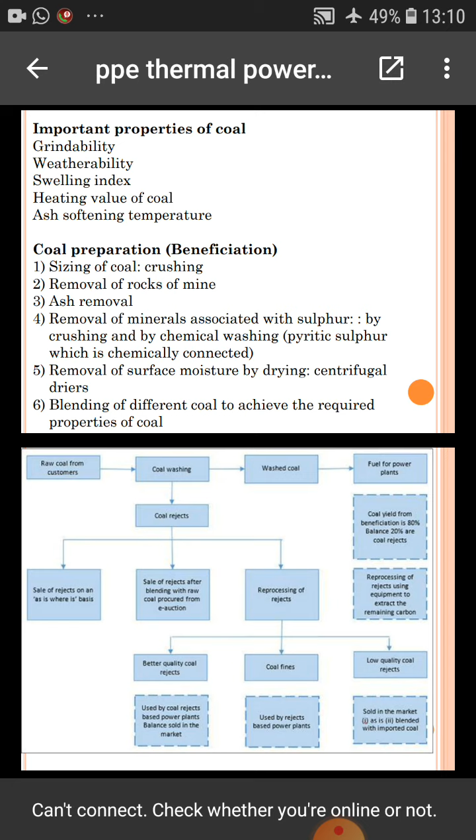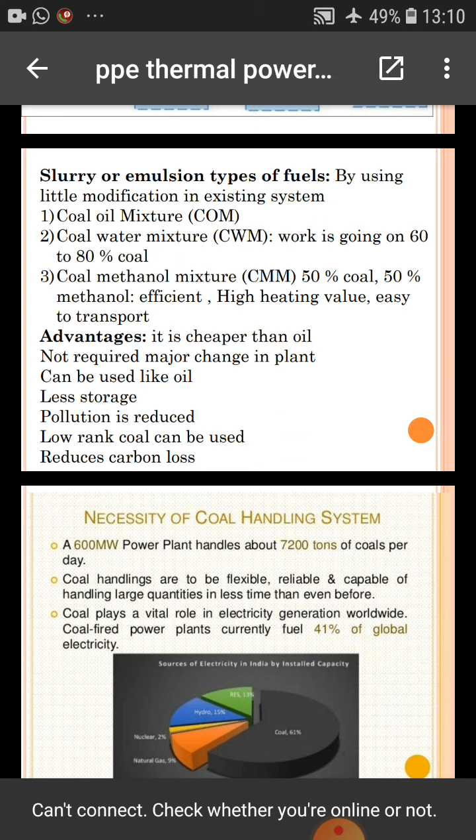Slurry or emulsion type fuels are made using little modification in existing systems: coal oil mixture, coal water mixture with 60 to 80% coal, and coal methanol mixture with 50% coal and 50% methanol. Advantages are that it is cheaper than oil, does not require major changes in the plant, can be used like oil, needs less storage, reduces pollution, low rank coal can be used, and reduces carbon loss.

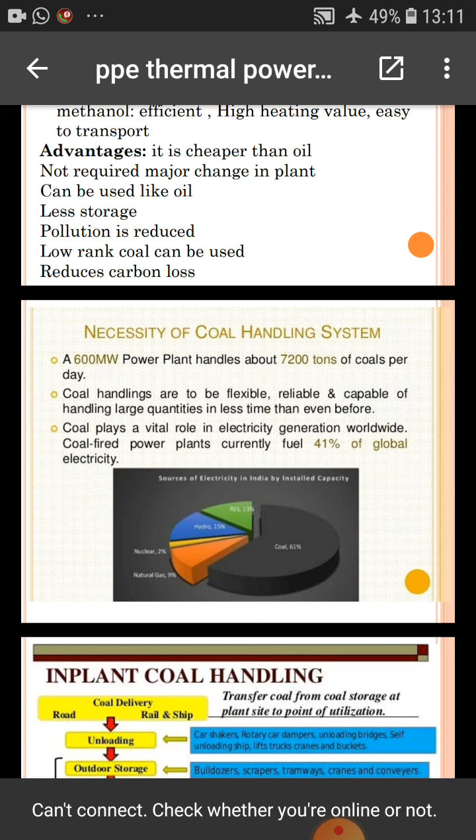Necessity of coal handling system: a 600 megawatt power plant handles about 7200 tons of coal per day. Coal handling has to be flexible, reliable, and capable of handling large quantities efficiently.

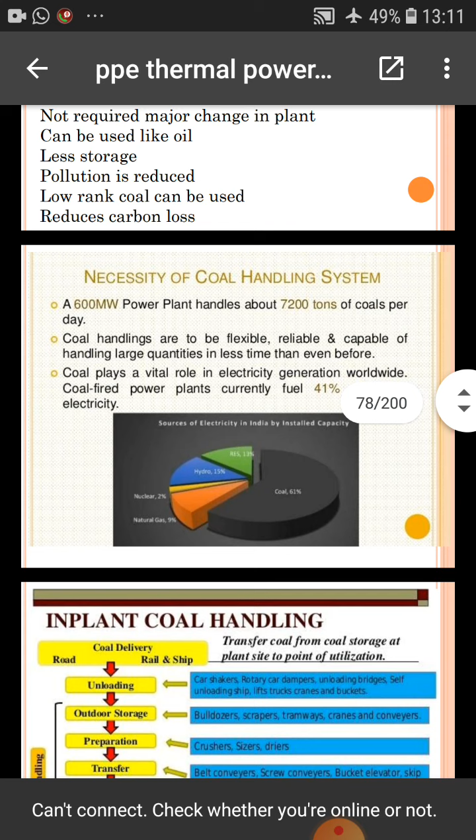Coal plays a vital role in electricity generation worldwide. Coal-fired power plants currently fuel 41% of global electricity.

In-plant coal handling includes coal delivery, unloading, outdoor storage, preparation, transfer, covered storage, inplant handling, weighting and furnace firing, and coal transportation by river, rail, road, and pipe.

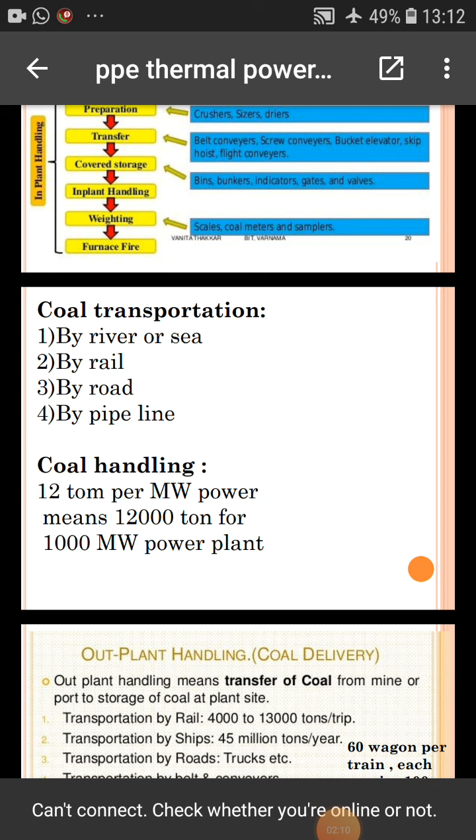Coal handling is about 12 tons per megawatt of power, meaning 12,000 tons for a 1000 megawatt power plant.

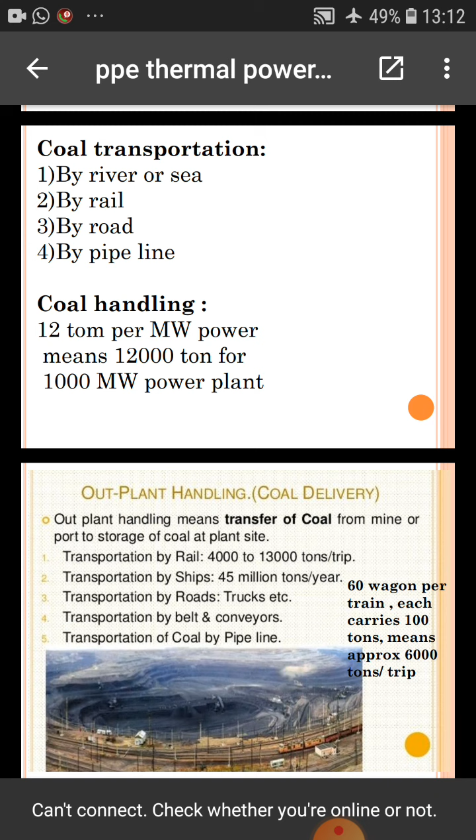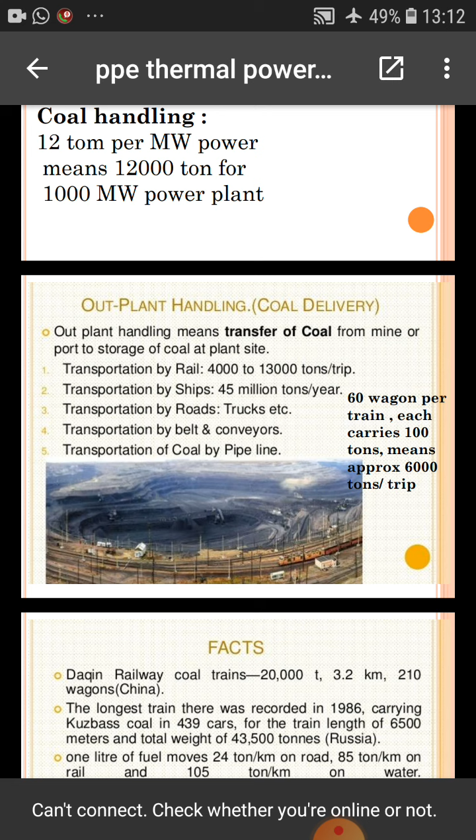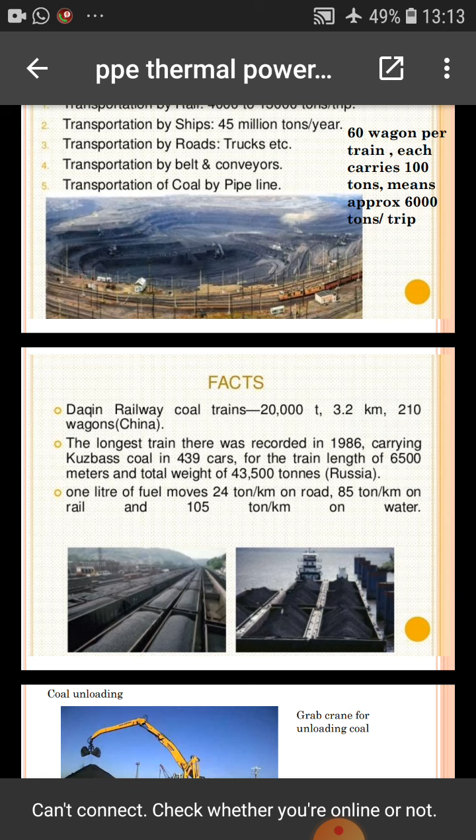Facts: a railway coal train of 20,000 tons over 3.2 kilometers with 210 wagons in China. The longest train was recorded in 1986 carrying Kuzbass coal in 439 cars, with a train length of 6,500 meters and total weight of 43,500 tons in Russia. One liter of fuel moves 24 ton-kilometers on road, 85 ton-kilometers on rail, and 105 ton-kilometers on water.

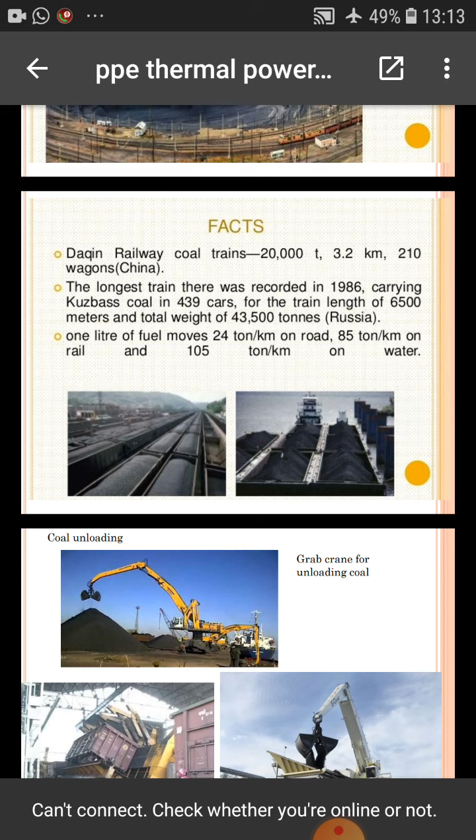Grab bucket elevator: it is used for lifting as well as transfer. This is the grab bucket elevator.

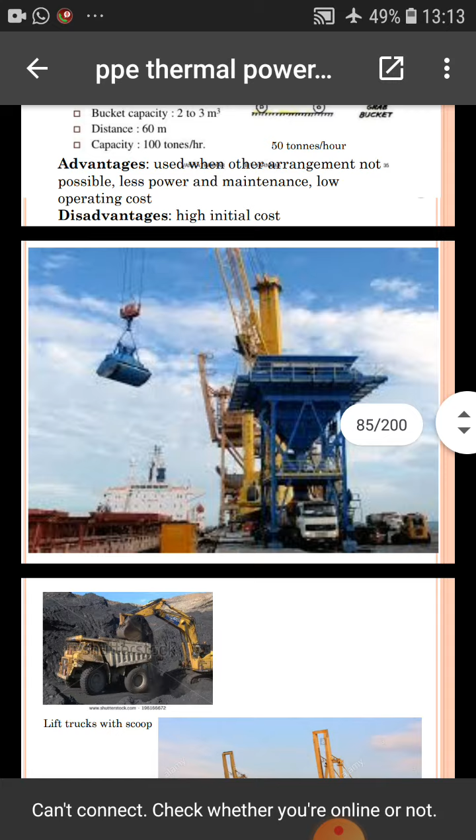For transfer of coal, different equipment includes belt conveyor, screw conveyor, bucket elevator, grab bucket elevator, flight conveyor or scraper, and skip hoist.

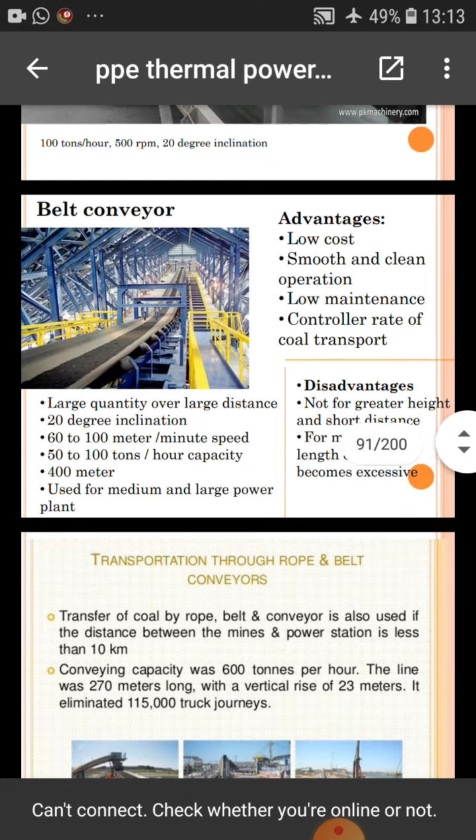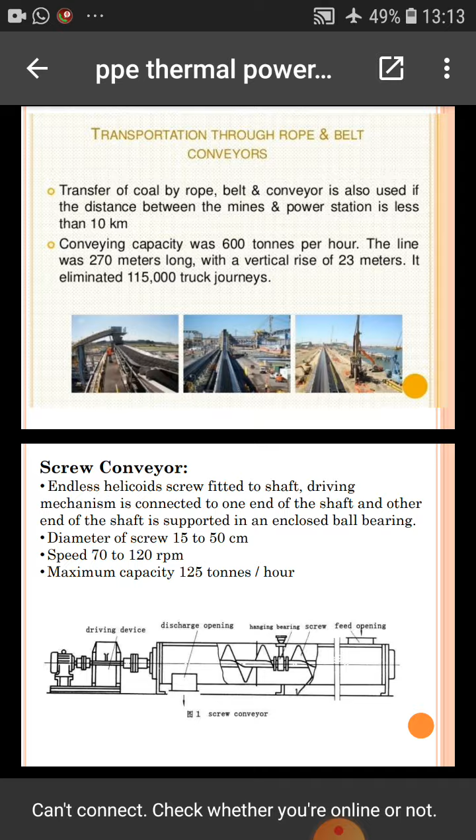Transportation by rope and belt conveyor are also used. These are all types of coal transportation: belt, screw conveyor, bucket elevator, flight conveyor or scraper, as already discussed.

Vibrating separator: this size separator is fitted after the crusher to screen out coal below the required size. Oversized coal is returned to the crusher for further proper crushing.

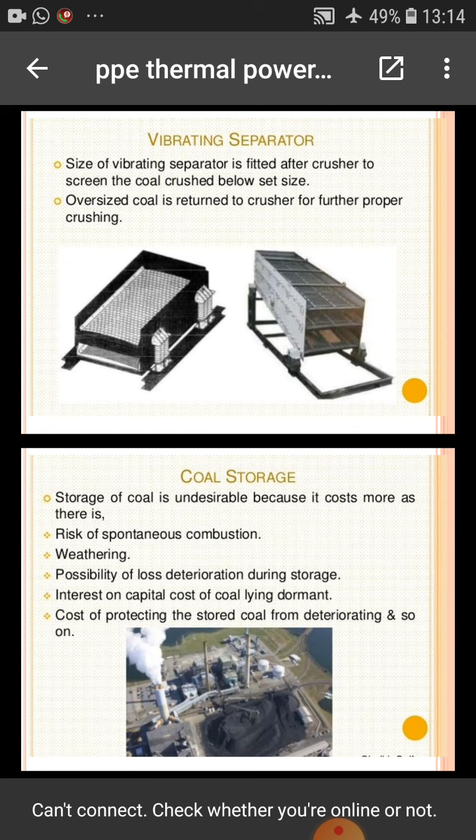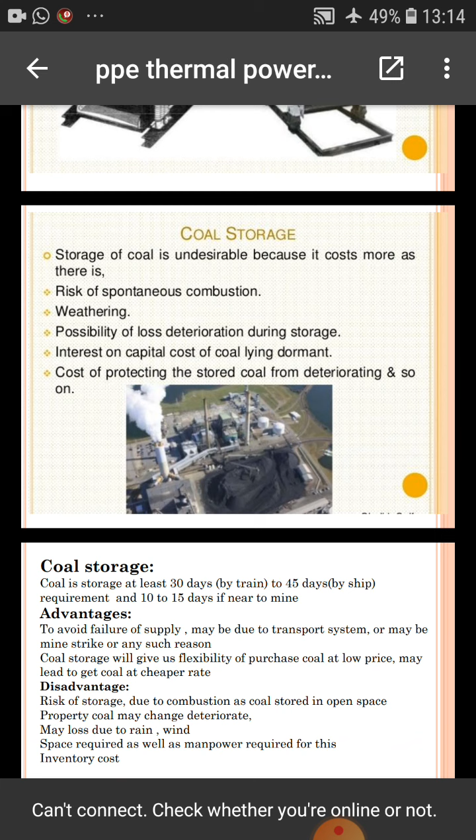Coal storage is undesirable because it costs more, as there is risk of spontaneous combustion, weathering, possibility of loss deterioration during storage, interest on capital cost of coal lying dormant, and cost of protecting the stored coal from deteriorating. So there are advantages and disadvantages to coal storage.

Coal is stored for at least 30 days if delivered by train, up to 45 days by ship, and only 10 to 15 days if near the mine.

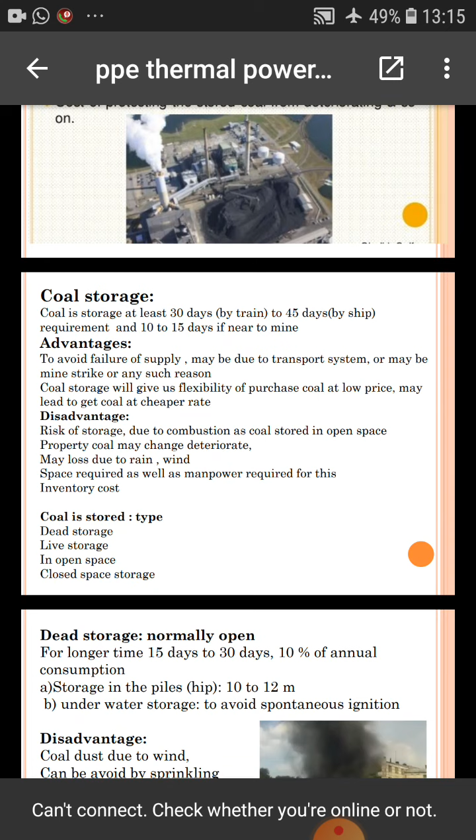There are advantages and disadvantages to this. To avoid failure of supply, coal storage gives flexibility and allows purchase of coal at low price, with may lead to get coal at cheaper rates. Disadvantages include risk of storage loss due to rain, and the space and manpower required adding to inventory cost.

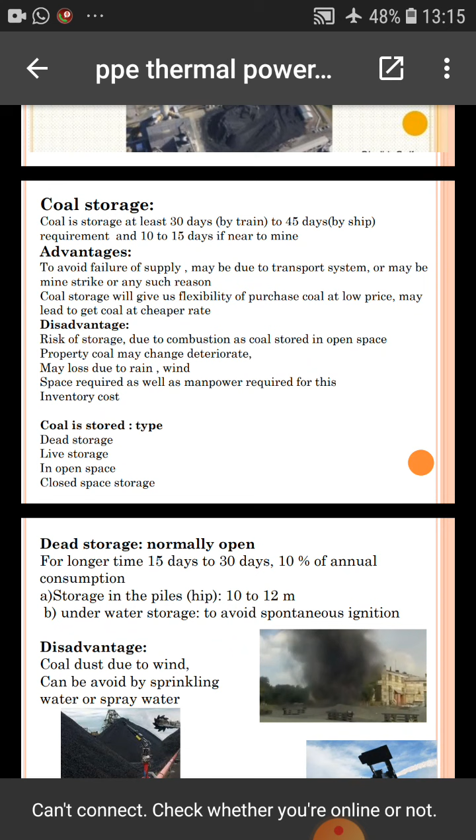Coal storage types include dead storage, live storage in open space, and closed space storage. Dead storage is used for longer periods, typically 15 to 30 days.

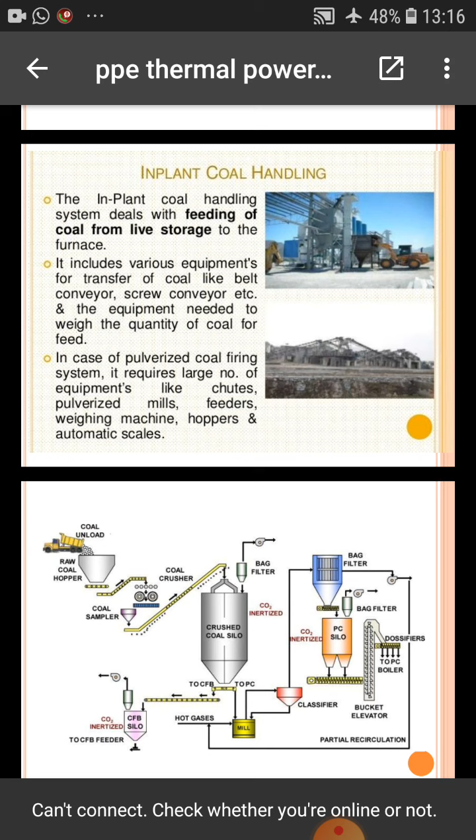In case of pulverized coal firing systems, it requires a large number of equipment like chutes, pulverized mills, feeders, weighing machines, and automatic scales.

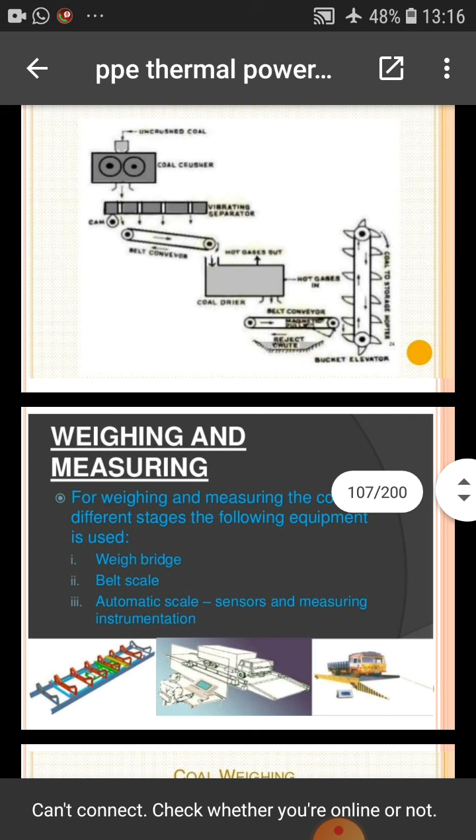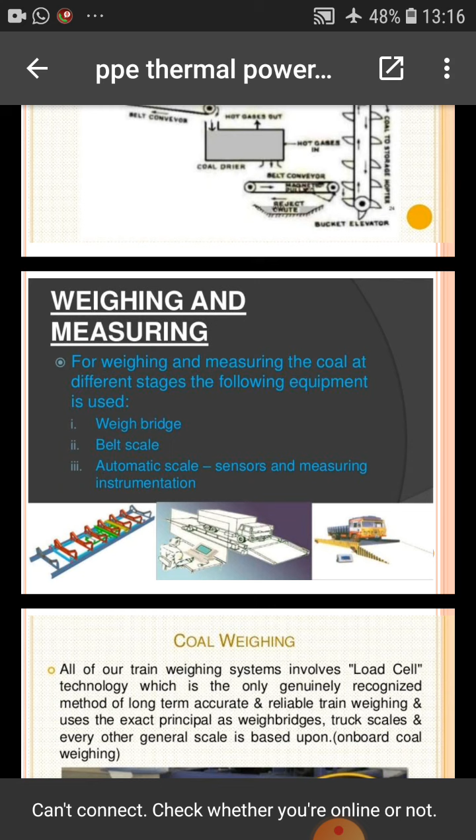After that, coal preparation involves weighing and measuring. For weighing and measuring coal at different stages, equipment used includes weigh bridge, belt scale, automatic scale, sensors, and measuring instrumentation.

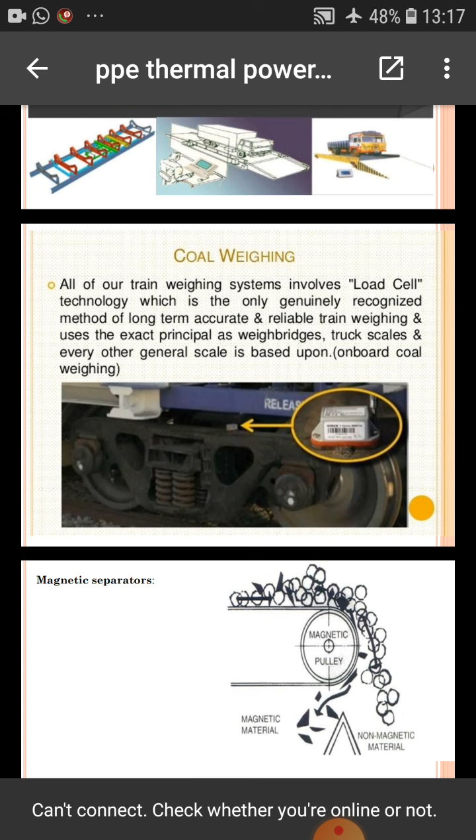Coal weighing: all train weighing systems involve load cell technology, which is the only genuinely recognized method of long-term accurate and reliable train weighing, using the same principle as weighbridges, truck scales, and other general scales based upon onboard coal weighing. Next is crushing of coal.

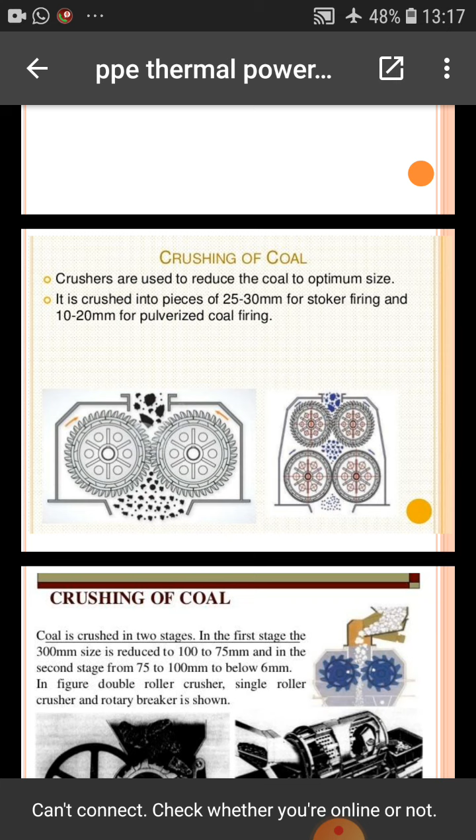Crushers are used to reduce the coal to optimum size. It is crushed into pieces of 25 to 30 mm for stoker firing and 10 to 20 mm for pulverized coal firing. Crushing of coal.

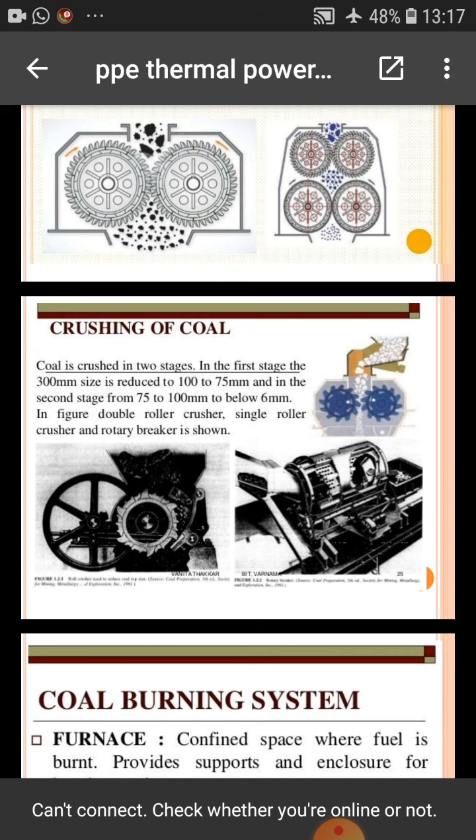Coal is crushed in two stages. In the first stage, the 300 mm size is reduced to 100 to 75 mm, and in the second stage, 75 to 100 mm to below 6 mm. In the figure, double roller crusher, single roller crusher, and rotary breaker are shown.

Coal burning system. Furnace: a confined place where fuel is burned, providing support and enclosure for burning equipment. For solid fuel like coal, coke, and wood, a stoker is used to convey the coal and a grate to hold the fuel.

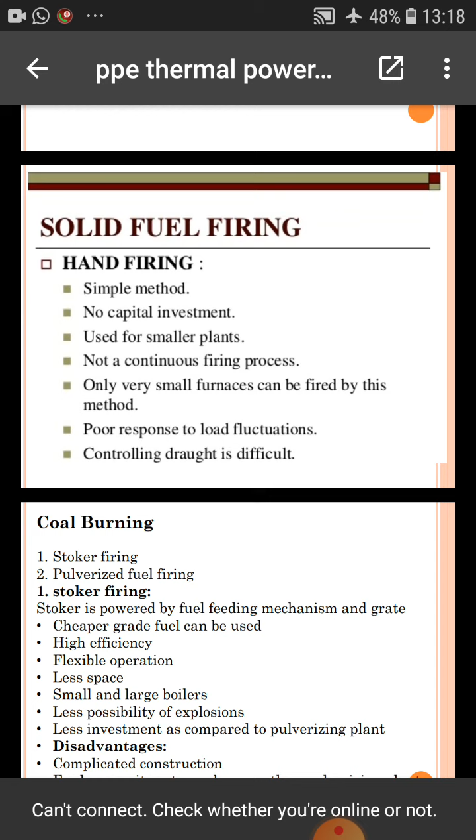For pulverized coal and liquid fuel, burners are used. Solid fuel firing includes hand firing and stoker firing. Hand firing is a simple method with no capital investment, used for smaller plants, and is not a continuous firing process. Only very small furnaces can be fired by this method.

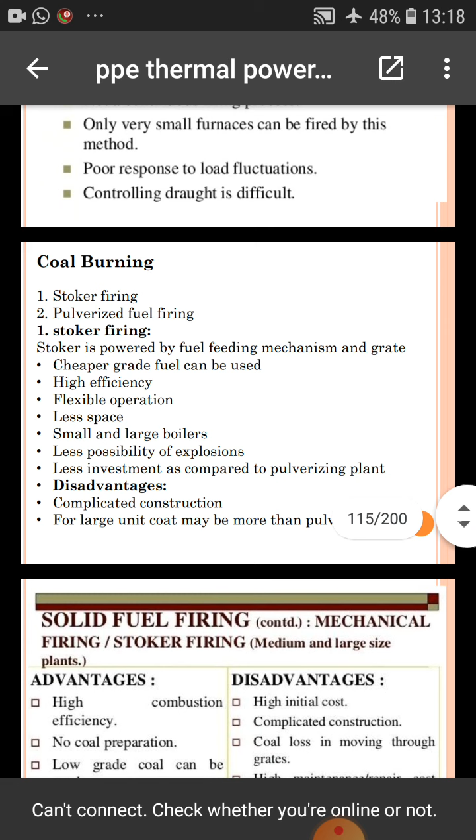Controlling draught is difficult in hand firing. Coal burning includes stoker firing and pulverized fuel firing. This is the coal burning process. After that, stoker firing: the stoker is powered by a fuel feeding mechanism and grate.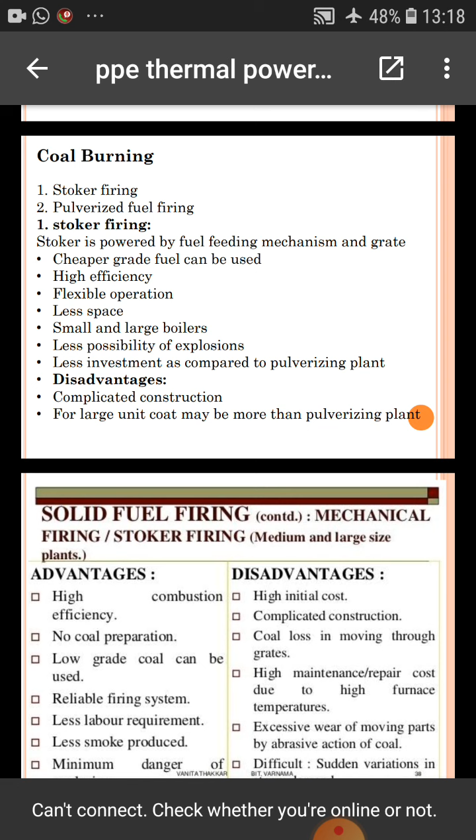Advantages and disadvantages of solid fuel firing. This is mechanical firing or stoker firing, used for medium and large size plants.

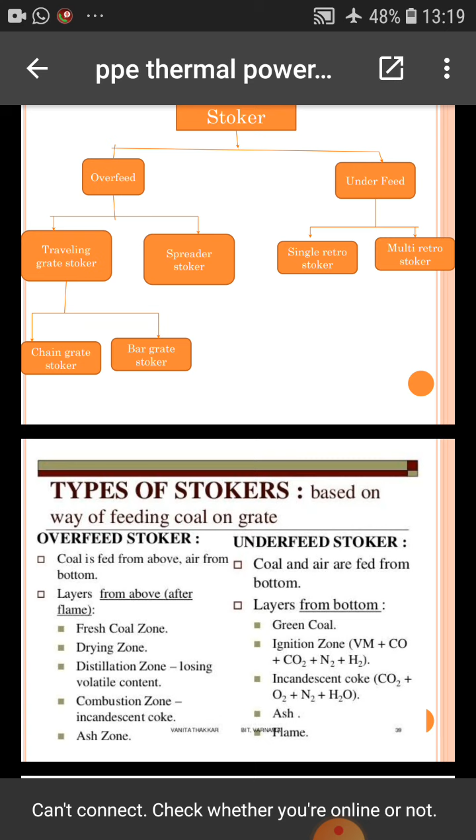Here, advantages and disadvantages are given in the table. This is a chart of stoker types: overfeed, underfeed, traveling grate stoker, spreader stoker, single retort stoker, multi retort stoker, chain grate stoker, and bar grate stoker.

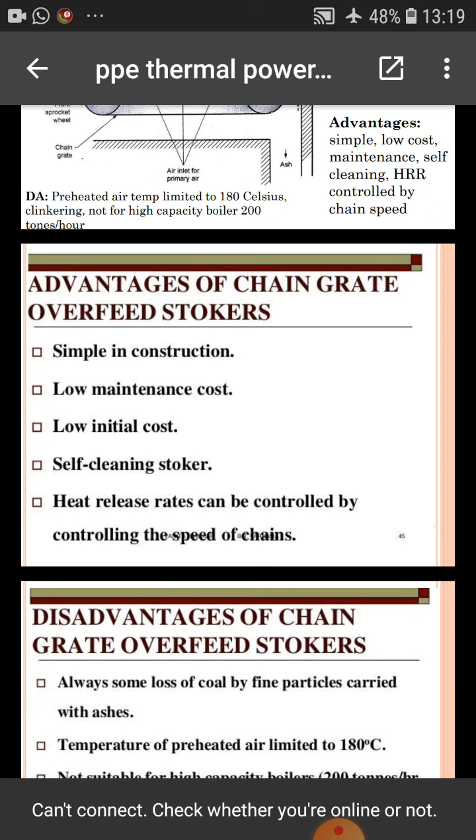This is the chain grate stoker. Advantages of chain grate stoker: simple in construction, low maintenance cost, low initial cost, self-cleaning stoker. Heat release rate can be controlled by controlling the speed of the chain.

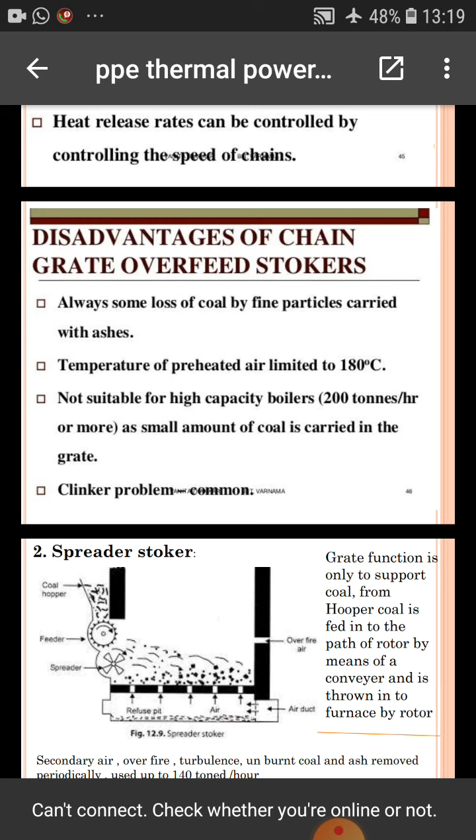Spreader stoker. This is the diagram of spreader stoker. The grate's function is only to support the coal. Coal from hopper is fed into the path of the rotor by means of a conveyor and is thrown into the furnace by the rotor.

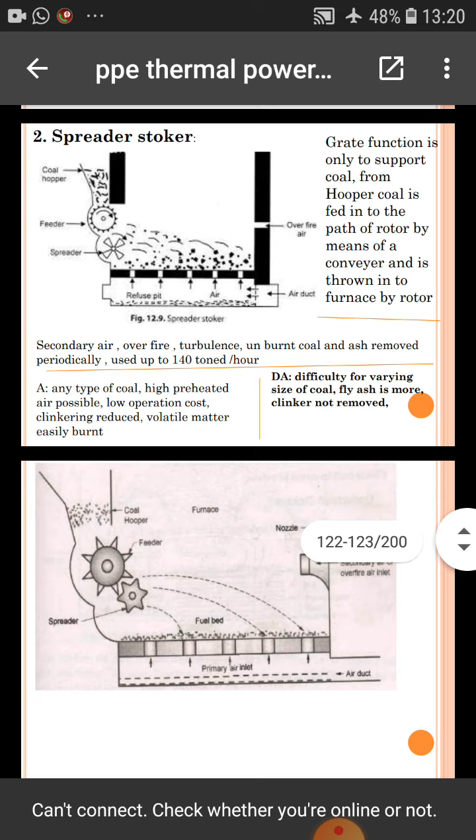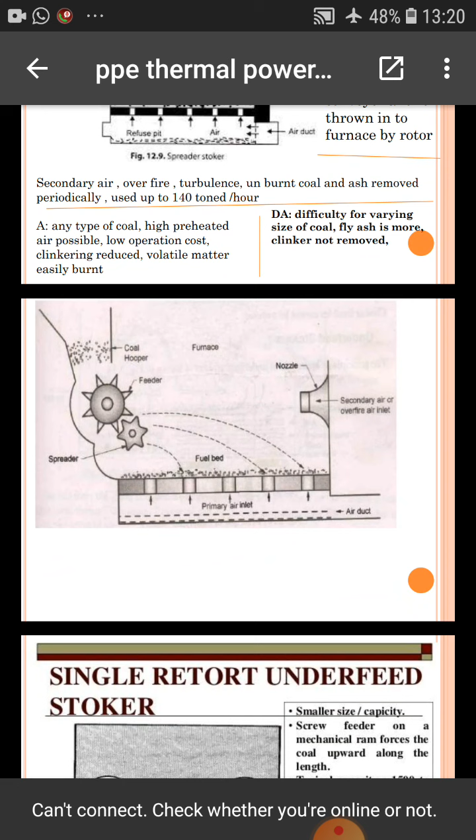Secondary air creates over-fire turbulence, and unburned coal and ash are removed periodically. Used up to 140 tons per hour. Single retort underfeed stoker.

In the smaller size and capacity screw feeder, a mechanical ram pushes the coal upward along the length. Typical capacity is 1500 to 15,000 kg per hour.

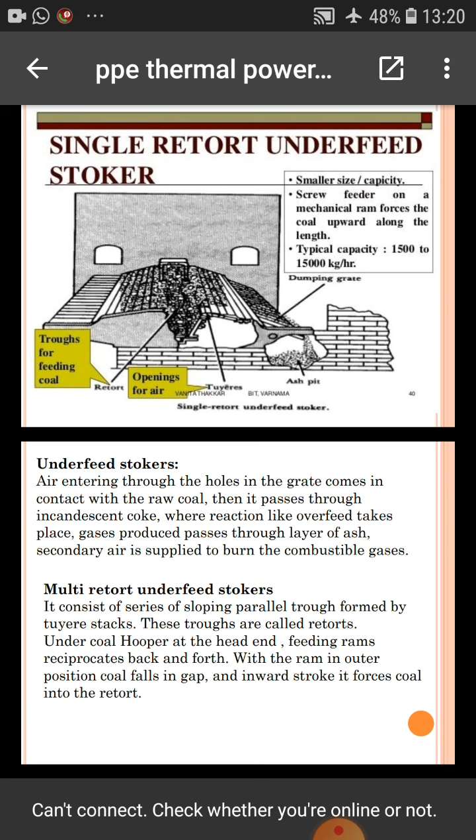In the underfeed stoker, air entering through holes in the grate comes into contact with the raw coal, then passes through the incandescent coke where reactions like overfeed take place. Gases produced pass through the layer of ash, and secondary air is supplied to burn the combustible gases.

Multi-retort underfeed stoker consists of a series of sloping parallel troughs formed by tuyere stacks. These troughs are called retorts. Under the coal hopper at the head end, the feeding ram reciprocates back and forth. With the ram in the outer position, coal falls in the gap, and in inward stroke it forces coal into the retort.

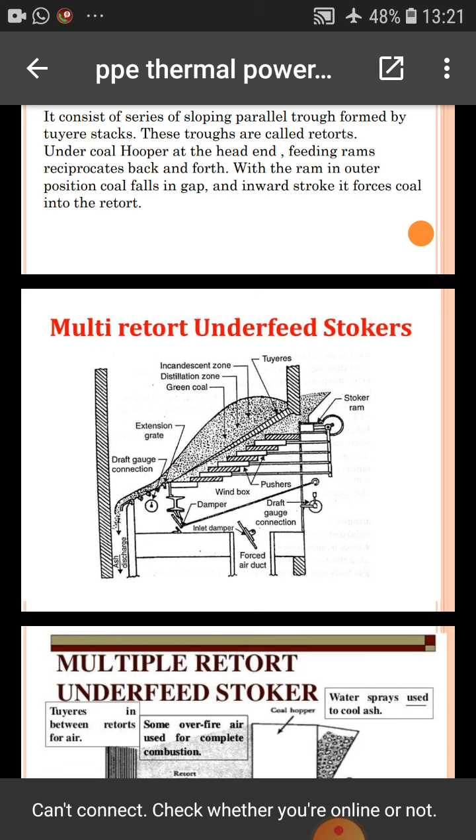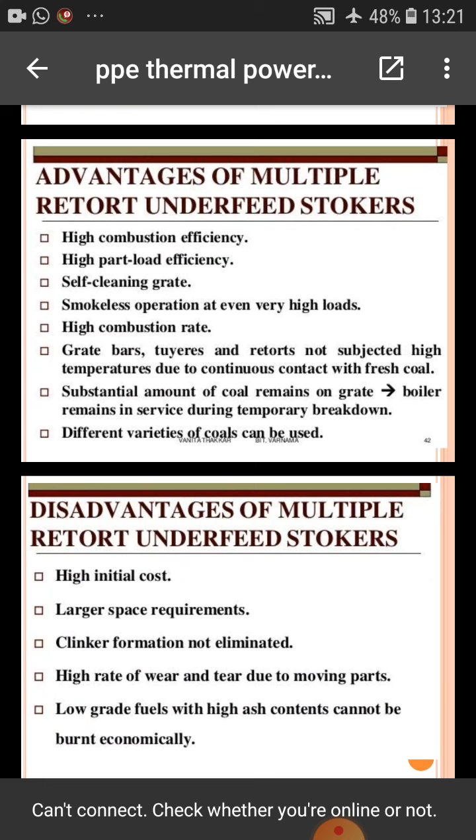This is the diagram of multi-retort underfeed stoker. Advantages and disadvantages of multi-retort underfeed stoker.

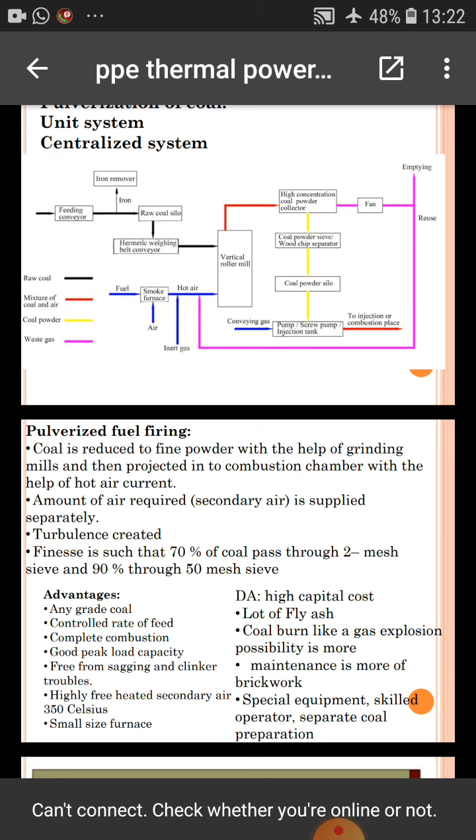Pulverized coal unit system and centralized system. In the pulverized coal system, coal is reduced to fine powder with the help of grinding mills and then projected into the combustion chamber with the help of hot air current. That is called pulverized fuel firing.

After that, unit system: this is shown in the figure, coal grinding plant for semi-direct firing. Advantages and disadvantages of unit system have been discussed.

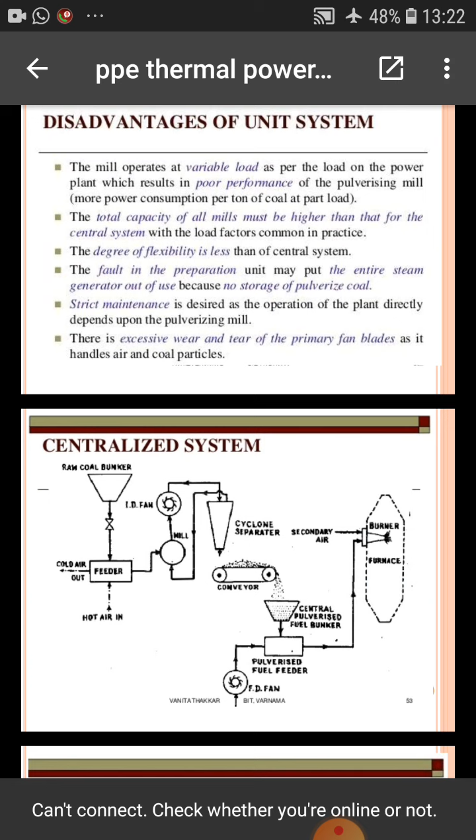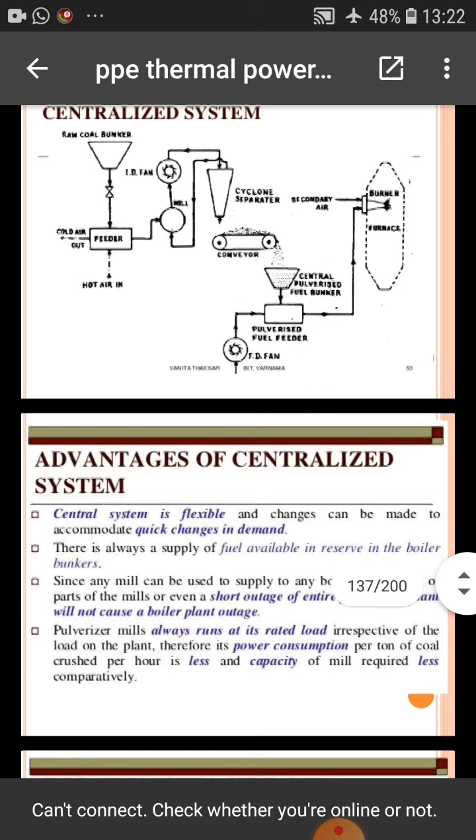After that, we have discussed the centralized system. The figure shows the centralized system, along with its advantages and disadvantages.

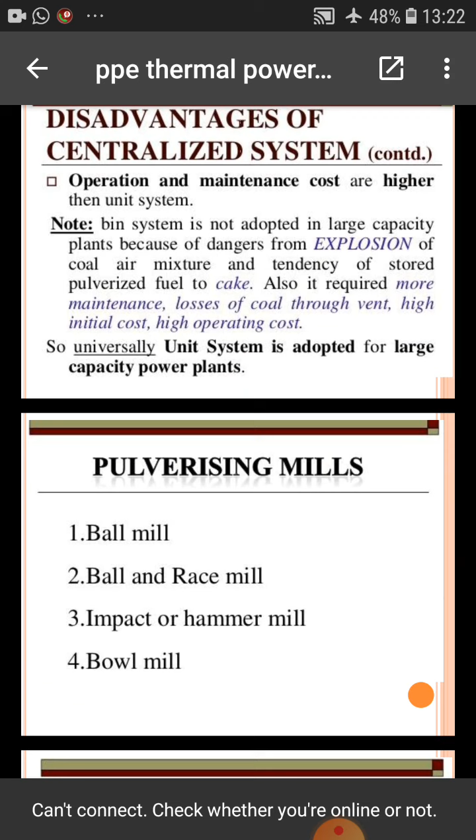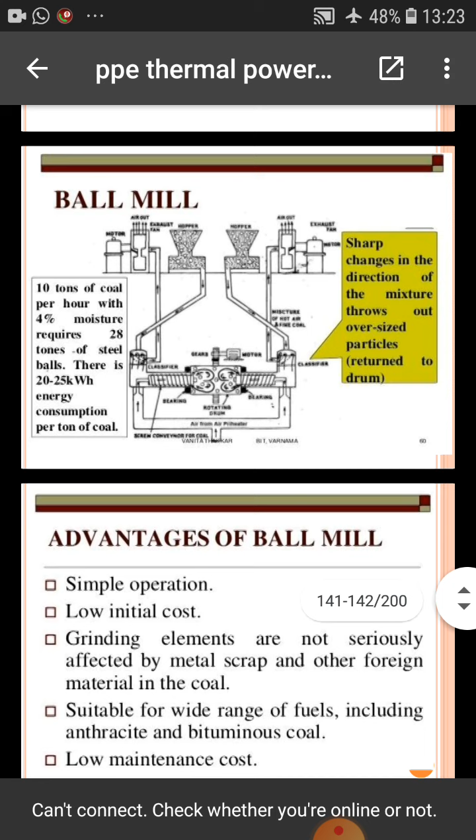Pulverizing mills: ball and race mills, impact or hammer mills, bowl mills. This is the ball mill: 10 tons of coal per hour with 4% moisture required, 28 tons of steel balls. There is 20 kilowatt-hour energy consumption per ton of coal for the ball mill. Advantages and disadvantages of ball mill.

Ball and race mill for pulverizing coal. This is a low speed unit in which grinding pressure is maintained and adjusted by springs. The coal passes between the two rotating elements again and again until it has been pulverized to the desired degree of fineness.

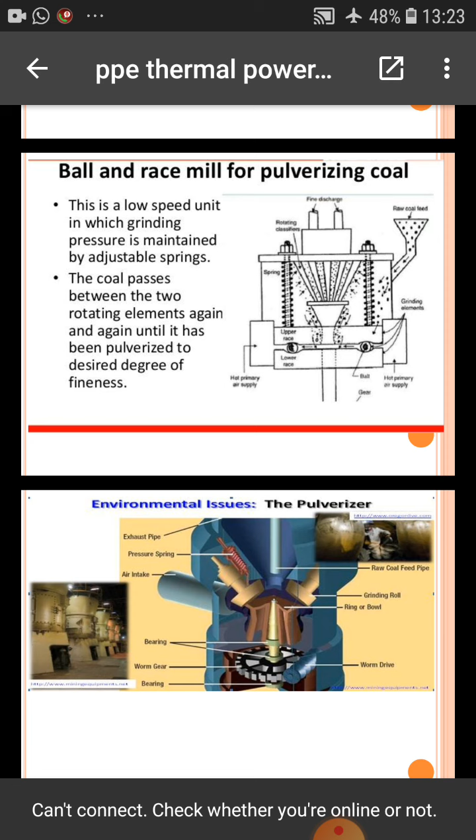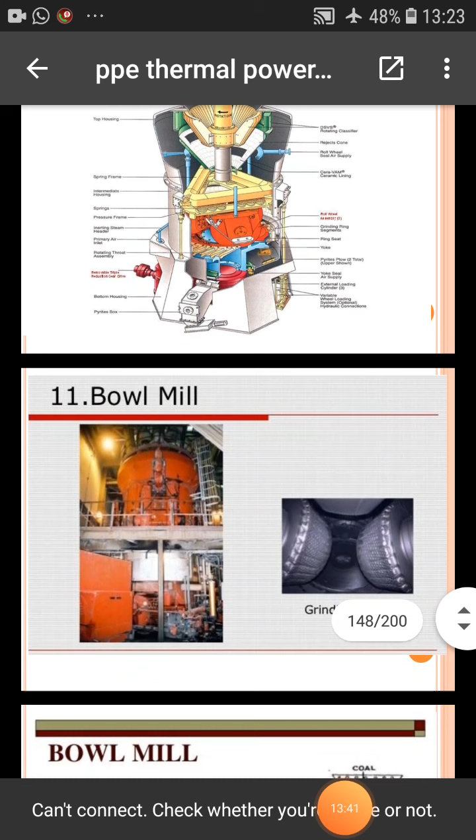The mill output can be easily varied as per the turn-down ratio from its minimum to maximum load. Crushed raw coal at a controlled rate is fed into the revolving bowl of the mill. Centrifugal force feeds the coal uniformly over the replaceable grinding ring, where independently spun rolls exert the required grinding pressure. The rolls do not touch the grinding ring even when the mill is empty.

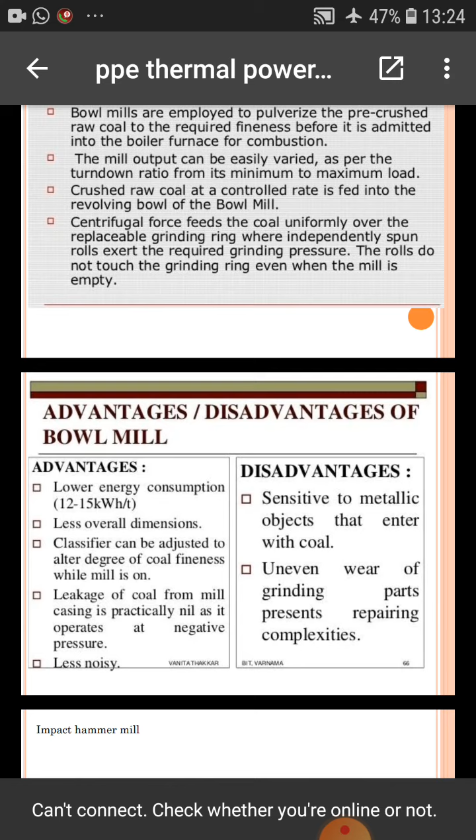Advantages and disadvantages of bowl mill.

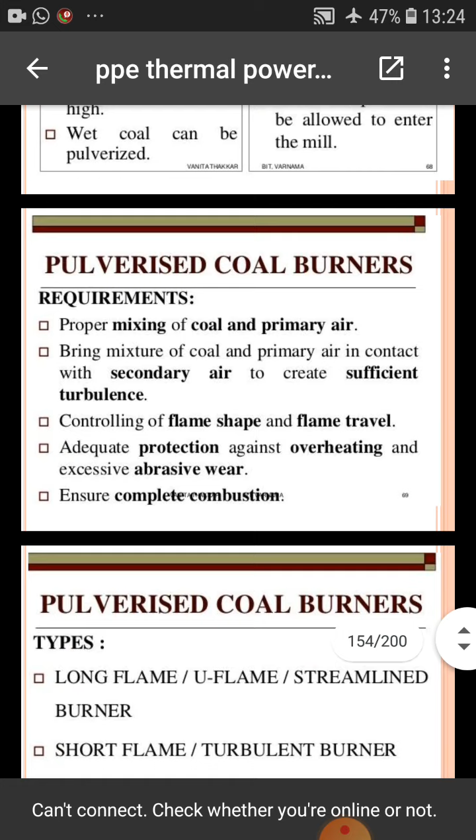Pulverized coal burners requirement: proper mixing of coal and primary air. Bring the mixture of coal and primary air into contact with secondary air to create sufficient turbulence, controlling flame shape and flame travel.

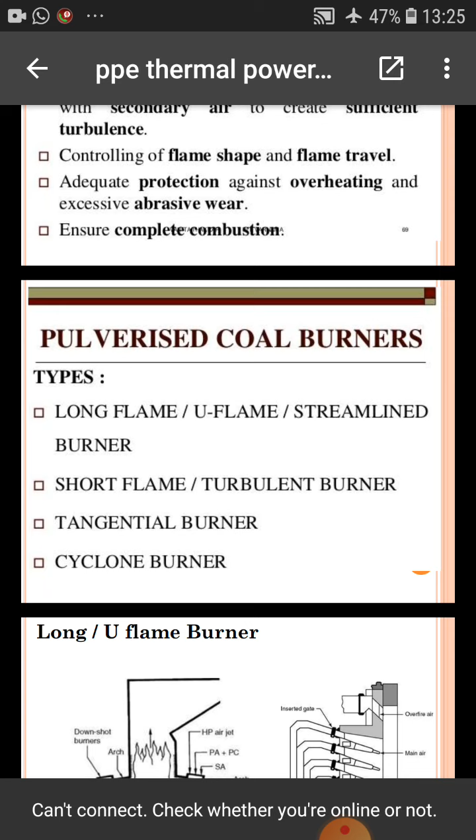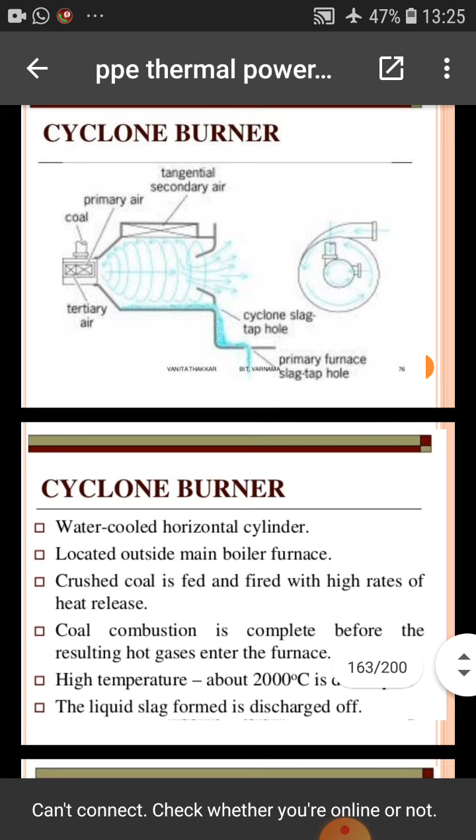Tangential burners, cyclone burners - figure shows cyclone burners. Advantages and disadvantages of cyclone burners, and oil burners.

Principle of oil firing. Types of oil burners: vaporizing burners and atomization burners.

Vaporizing burners: oil is vaporized or gasified by heating within the burner. Used in blow torches and gasoline stoves. Not used in boilers for steam generation.

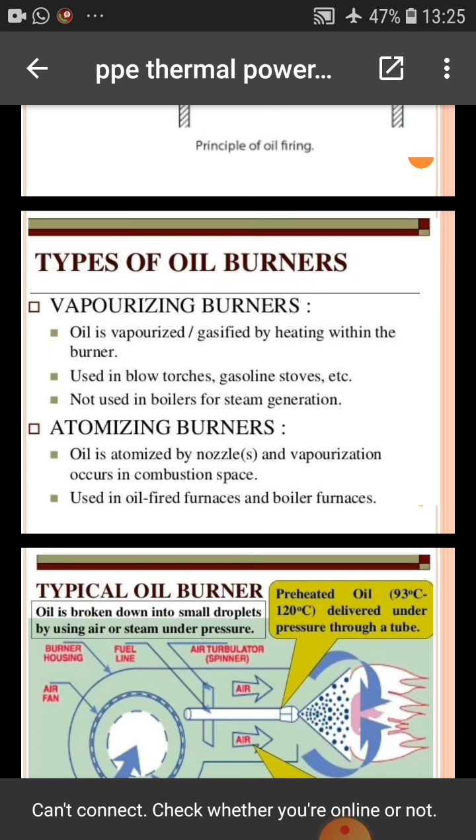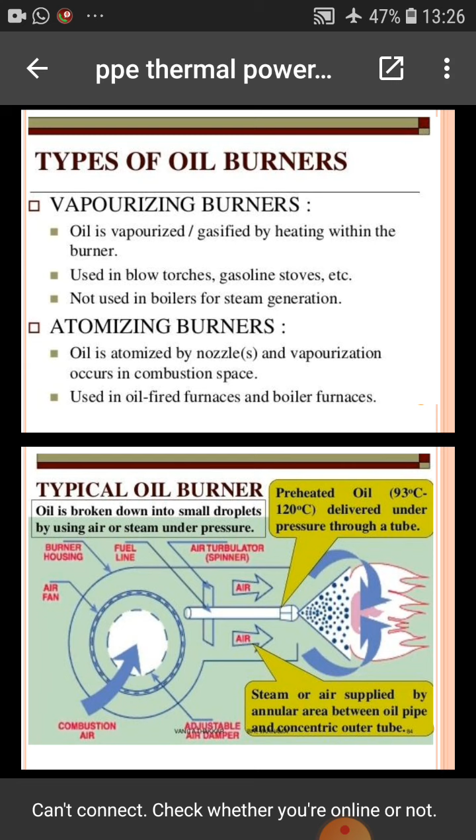Atomizing burners: oil is atomized by a nozzle and vaporization occurs in the combustion space. Used in oil fired furnaces and boiler furnaces. Typical oil burners are shown in the figure.

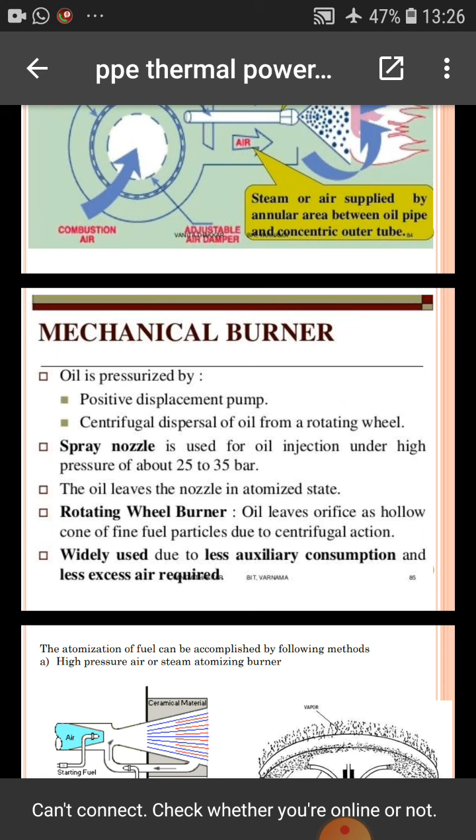Mechanical burners: oil is pressurized by a positive displacement pump, with centrifugal dispersal of oil from rotating wheels through a spray nozzle - the rotating wheel burner. Widely used due to less auxiliary consumption and less excess air required.

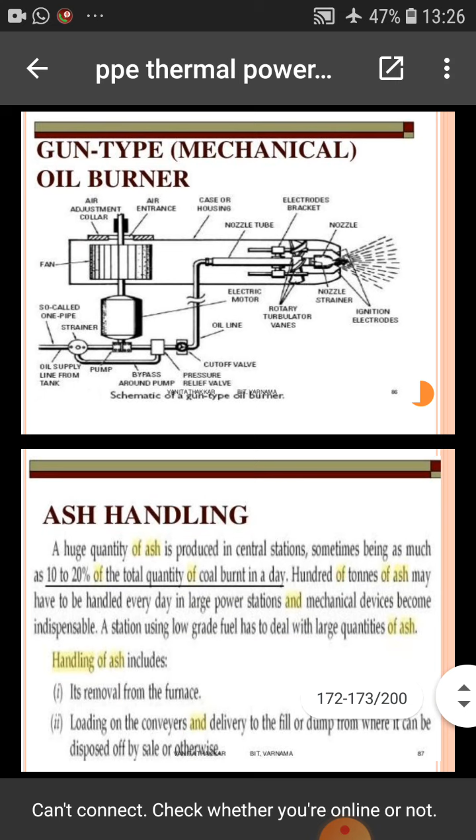Gun type oil burner. After this, the last point: ash handling.

Ash: a huge quantity of ash is produced in a central station, sometimes as much as 10 to 20% of the total quantity of coal burned in a day. Hundreds of tons of ash may have to be handled every day in a large power station, and mechanical devices become indispensable. A station using low grade fuel has to deal with large quantities.

Handling of ash includes its removal from the furnace, loading onto conveyors, and delivering it to the fill or dump from where it can be disposed of by sale or otherwise.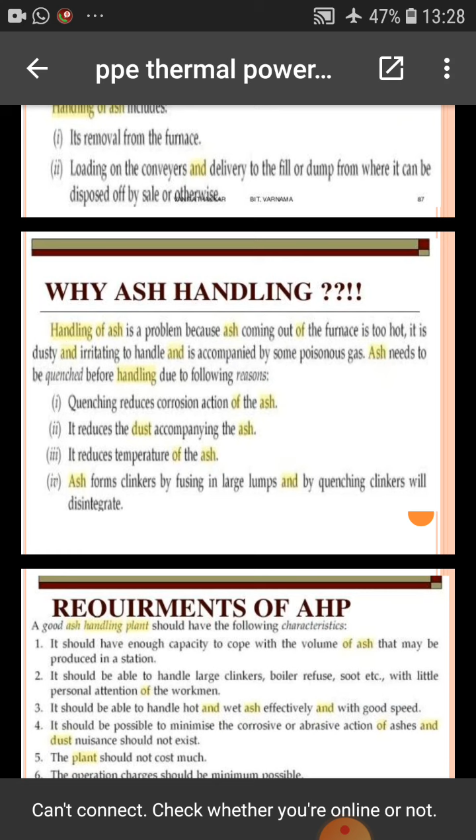Ash forms clinker by fusing into large lumps, and by quenching, the clinker will be disintegrated. Requirement of AHP (ash handling plant).

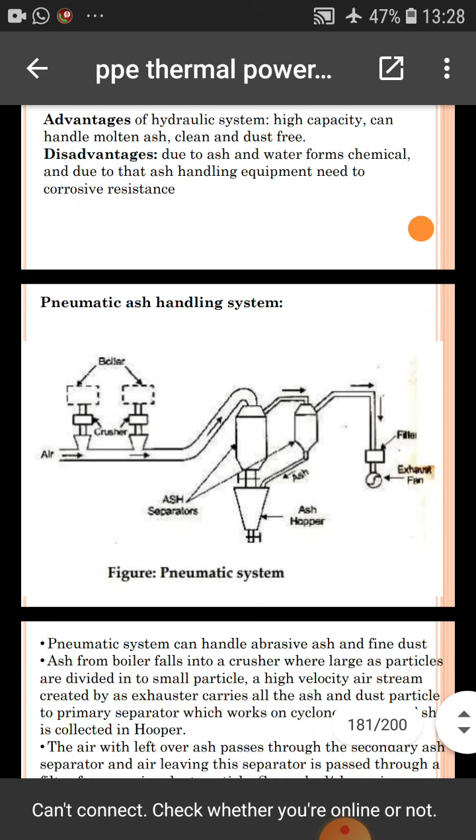Pneumatic system, high velocity hydraulic ash handling system, and low velocity hydraulic ash handling system.

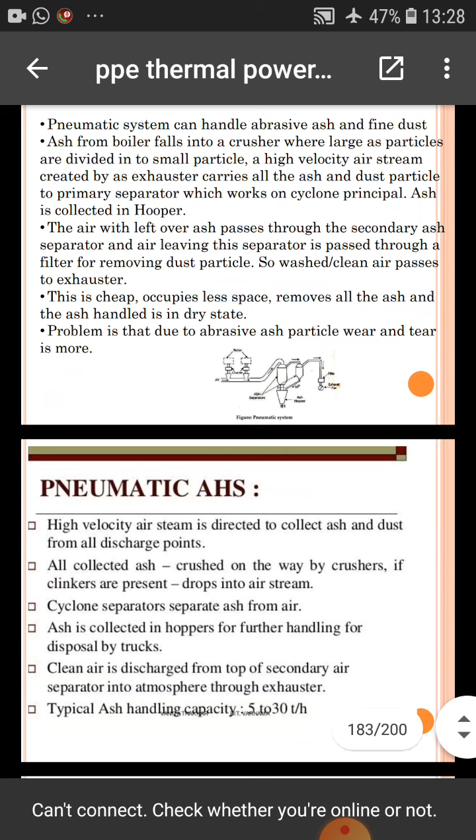Pneumatic ash handling system: advantages of the pneumatic ash handling system, and disadvantages of the pneumatic ash handling system. Dust collector.

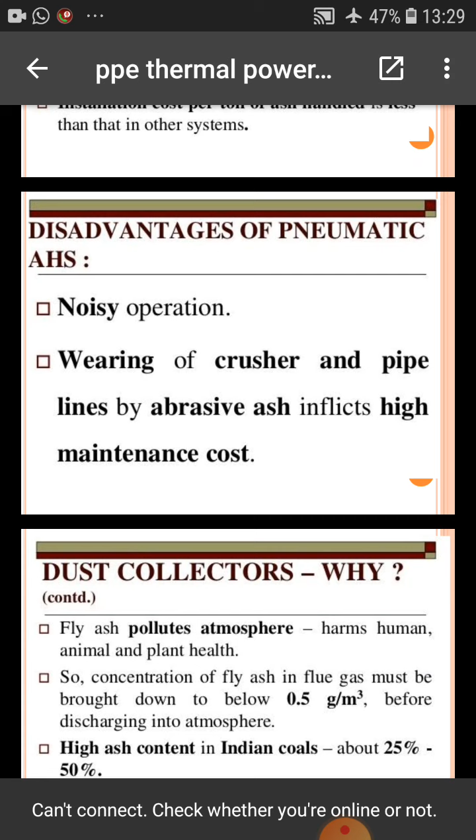Fly ash pollutes the atmosphere and harms human, animal and plant health. So the concentration of fly ash in flue gases must be brought down to below 0.5 gram per meter cube before discharging into the atmosphere. High ash content in Indian coal is about 25% to 50%. A 200 megawatt plant using pulverized coal produces about 250 tons of fly ash per day.

Dust collector: the flue gas exhaust contains fly ash. Flue gas exhaust in a pulverized coal fired boiler contains 80% of the ash content of the coal. Fly ash is very fine - most of the particles can pass through a 300 mesh 40 micron screen, with particle size varying from 1 micron to 80 micron.

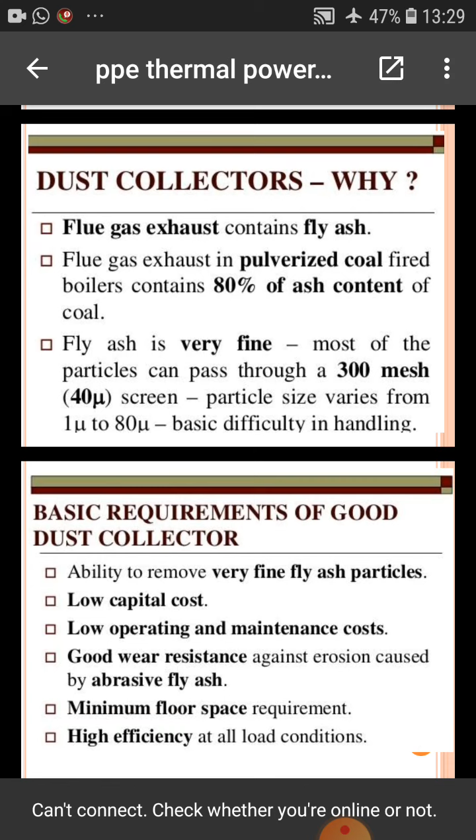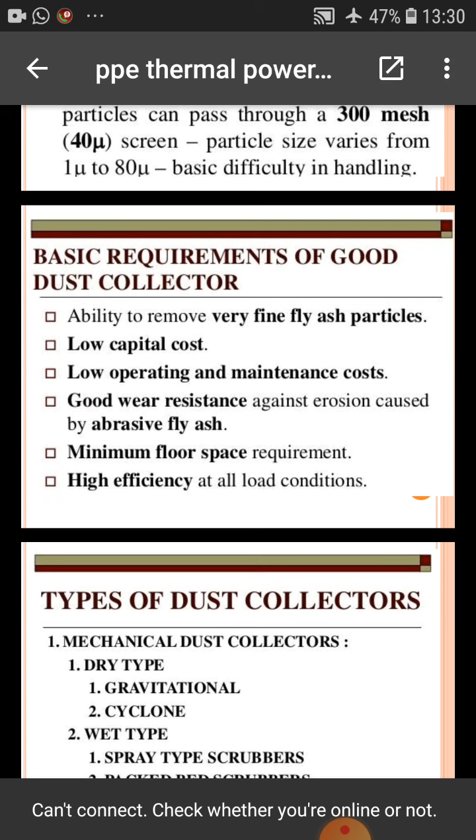Basic difficulty in handling very fine fly ash particles. Basic requirements of a good dust collector: low capital cost, low operating and maintenance cost, good wear resistance, minimum floor space, and high efficiency.

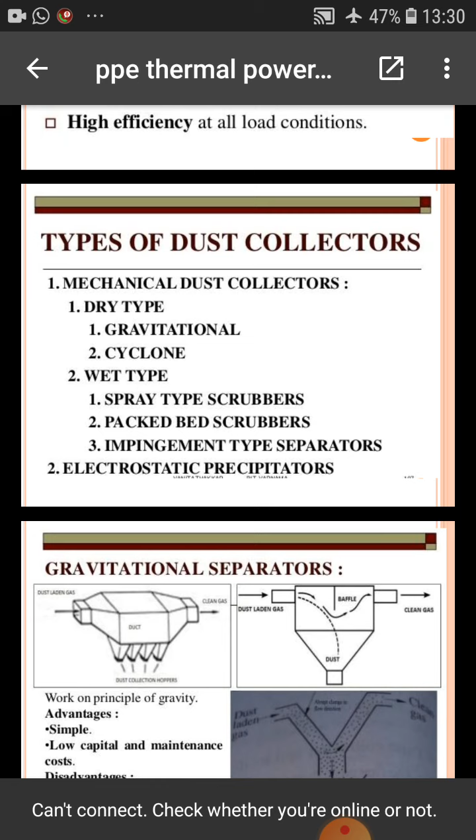Types of dust collector: mechanical dust collector - dry type (gravitational and cyclone), wet type (spray type scrubber and packed bed scrubber), impingement type separator, electrostatic precipitator, and gravitational separator, among others.

Cyclone dust collector, commonly used for stoker as well as pulverized fuel firing, with efficiency of 60% to 90%. Cyclone dust collector.

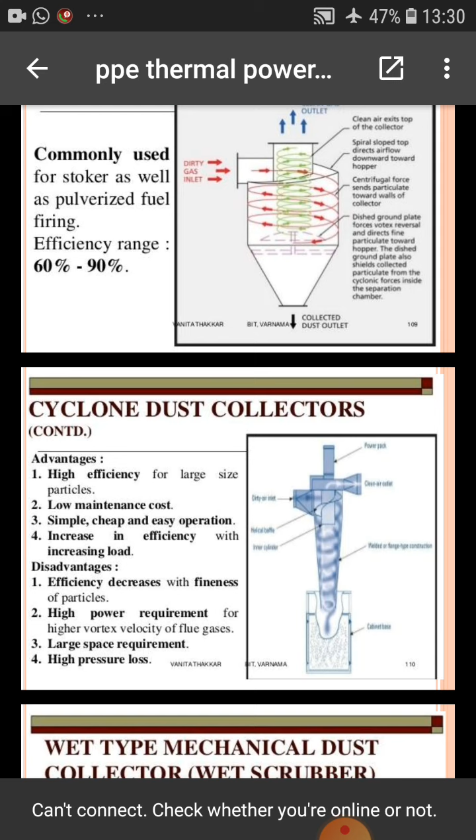Wet type mechanical dust collector - the picture shows a wet scrubber.

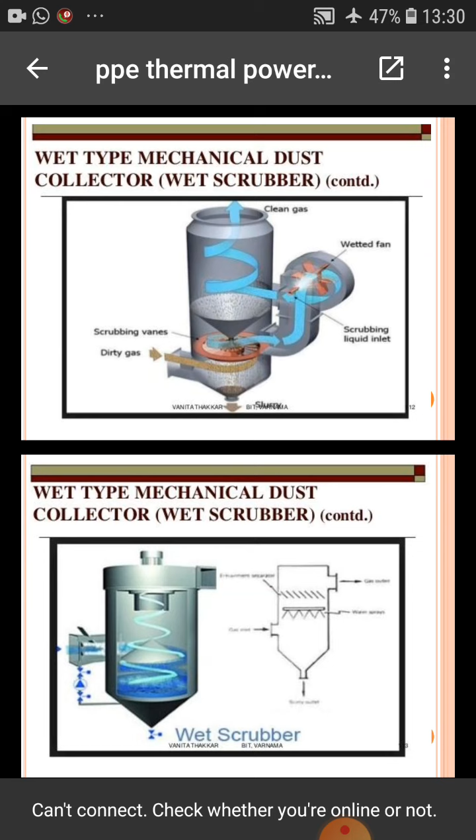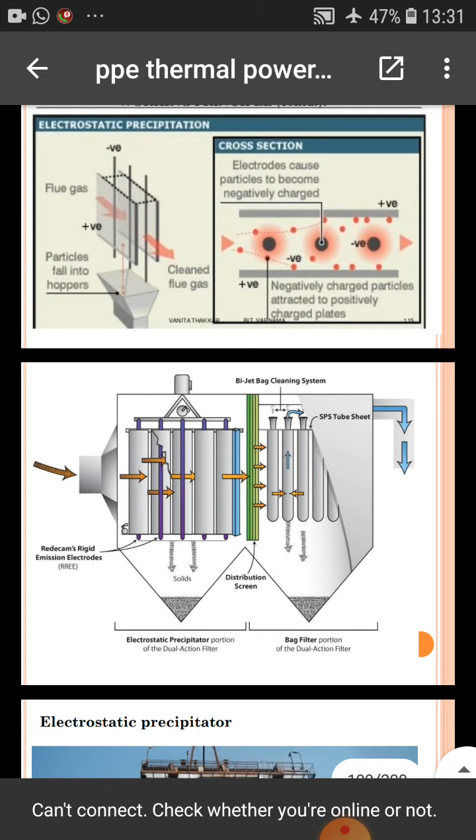Electrostatic precipitators. Figure shows the electrostatic precipitator.

Working principle: see here, flue gases pass on the electrode, clean gas is removed from the other side, and particles fall into the hoppers.

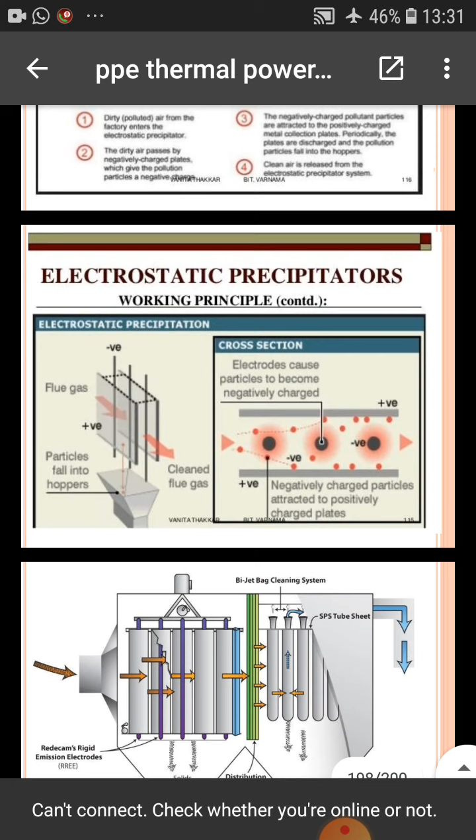This is where we have covered the first unit revision. We conclude the first unit here, having completed the first unit revision. Now in the next lecture we will discuss the second unit. Thank you.